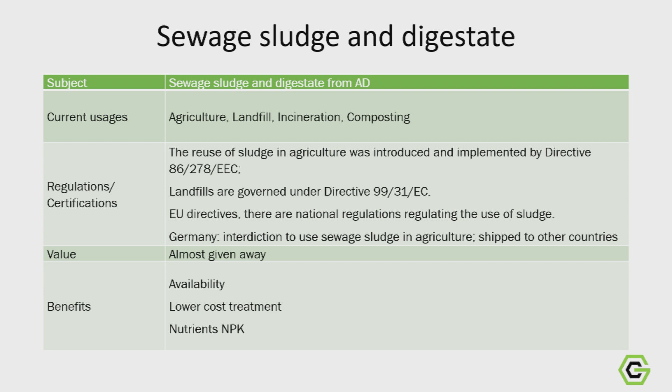What is driving the opportunity with these materials? So again, manure, sludge, digestates after anaerobic digestion, and biosolids that come out of wastewater treatment plants. Project developers, technology manufacturers, and even some municipalities are looking at pyrolysis and gasification more to treat these. So the drivers for adoption would likely be the regulations that we mentioned. The tipping fees for landfills are starting to skyrocket. There's not a lot of space in landfills, and there's a big blockage of new landfills opening, which is really limiting the space.

And so there have to be ways to monetize rather than pay to get rid of. In the EU, there is also a push to recover more phosphorus and to depend less on imports of phosphorus from other jurisdictions.

The other piece is when project developers think about pyrolysis or gasification, they're also viewing digestates and biosolids as a very low-cost feedstock. Whereas most pyrolysis and gasification is done with wood waste, or more and more agricultural waste, there is still a significant cost linked to purchasing or bringing these materials to the facility. So digestate, in some cases, and biosolids really provide this opportunity to optimize the economics of the project based on the cost of biochar. Of course, they make different products, but that's something we see as quite interesting. Even more so for biosolids, where these plants can actually receive tipping fees for taking this material.

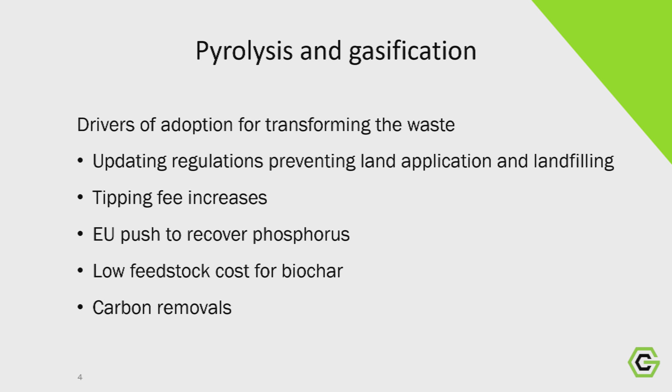And the last piece is carbon removals. Obviously, there's a lot of focus here on carbon today. We do carbon project development. Our clients get into this space also with the intention of generating carbon revenue, in addition to the tipping fees, and potentially also selling the biochar. So all these revenues become stackable.

So this is a very similar table, just a comparison, but for the biochar from sewage sludge. The current usages are varied. It depends if it is digestate or sewage sludge biochar. It depends on the properties of the biochar, but generally we see that it's used in agriculture, in construction materials, for composting, for example. So the standards that have to be respected for agriculture are very important.

And I would say that another driver, I forgot to mention it, that's a little bit last minute, is contaminants. So PFAS in biosolids particularly, and other types of organic contaminants that can come also from anaerobic digestate, not necessarily from food waste, but maybe other types of feedstock, can also cause problems. And the legislation is coming into place to limit the usage or even to limit these contaminants in the environment. So when we're transforming them with pyrolysis or gasification at certain temperatures, in certain conditions, we can degrade these contaminants, or a big part of these.

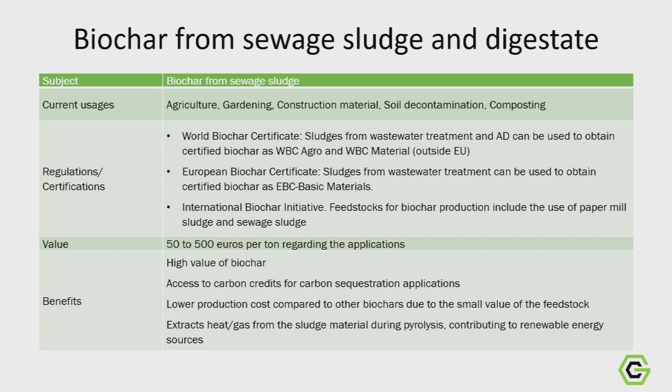So now that we talked about making pyrolysis and making biochar, how do we actually use it? What is this biochar useful in when it comes from wastewater, biosolids, or when it comes from digestate? There are different ways of adopting it and using it. I've also included in this list the usage of biochar that don't necessarily come from these feedstocks, but that can be used in processes around anaerobic digestion, for example.

We've seen that some tests are being run for usage of biochar directly in AD reactors. Some results have come out with increasing methane yield, so that's pretty interesting, right? Increasing revenues from biogas. And we've also seen people using biochar in composting. So, for example, anaerobic digestion biochar can be used in composting, probably to accelerate as well the speed of composting.

We also have a client that has tried putting biochar in manure lagoons for treatment, and when they showed up 2 days later, there was barely any smell in pig lagoons. So that's pretty wonderful, and it's really around, again, this anaerobic digestion and methanization processes.

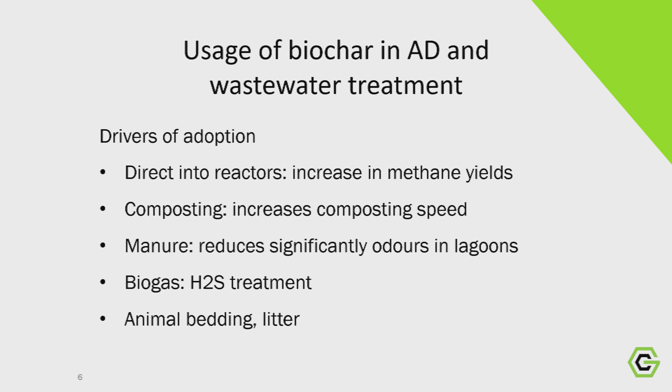Finally, 2 examples, and I'm sure that maybe some people will talk a little bit about these too, but there also have been more and more trials for H2S sorption or removal in the treatment of the gas coming out of biogas, and also in animal bedding. So that's a really good example: biochar from anaerobic digestion can be put in animal bedding, chicken litter, for example, to absorb ammonia, reduce pulmonary diseases, and reduce odors, of course. So this was very brief.

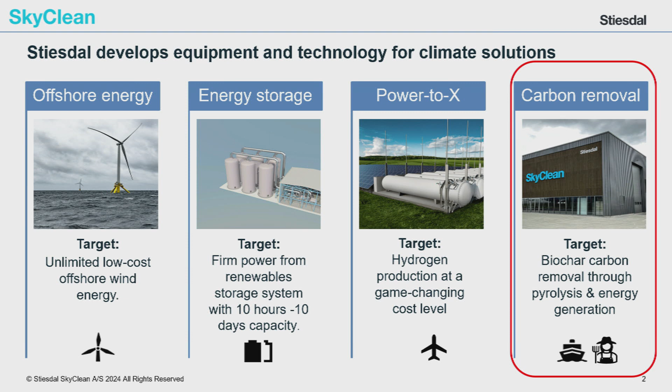Just briefly where I come from. The main company is called Stiesdal, and we have 4 subsidiaries working with different kinds of technologies for climate solutions. So we work with offshore floating windmill foundation, we work with energy storage, we work with electrolysis, and then we work with carbon removal, which is through pyrolysis.

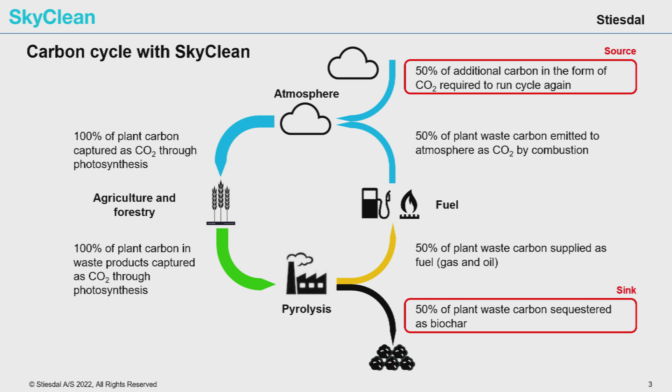The basic idea of producing biochar is kind of laid out in this nice little cartoon. So we let nature do the job of taking the CO2 out of the atmosphere. We take residues primarily from agriculture. We also work with forest residues, but primarily with agricultural residue. We take the residues and then we do pyrolysis. We make biochar with a high permanence, and then we use the gaseous products for energy purposes. And with the one I will talk about today, it's the simplest way of utilizing the gas, so it's just pure combustion.

So the way we do pyrolysis is that we have what we call an updraft pyrolysis reactor, and for that to be as smooth as possible, we use pelletized feedstock. So we have our own pelletizing. We also have drying if it's a wet feedstock, which digestate usually is. The nice thing about doing pellets is that you have a very smooth operation of the process, but also in this process you get the biochar out as pellets afterwards.

So when you look at the whole value chain, you will need to bring the biochar back to agriculture. We are focusing on very big plants, so we are going to handle a lot of biomass, and we are going to handle a lot of biochar, and primarily in an agricultural context. So we need to have something afterwards that is durable to handle and durable to spread out, but I'll get back to that.

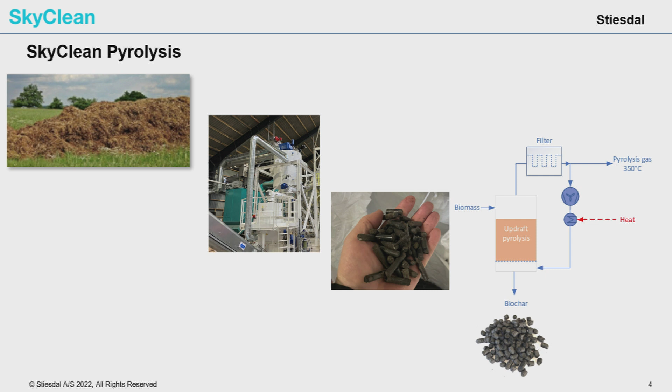We are not an old company. Basically, we started with pyrolysis a bit more than 3 years ago. The process that we have came from the Technical University of Denmark, and that's actually my background. I worked there for 20 years with pyrolysis and gasification, developing new technologies. So I kind of took my baby under the arm and then went into this company. And then it's been a relatively fast track since then. So what we did was actually build a very small scale plant to begin with, but fully automated to get hold of the controls of the process.

Then we built in 22 a 10 times bigger plant, which is still running, and it's in operation today as we speak. That is mainly fueled with straw pellets, which we buy commercially. Sorry. So all the learnings we had from that, we put into the next scale up, which is our 20 megawatt plant, which we have built right now, and it's being put into operation as we speak. It's, as you can see on the picture, placed next to a very big biogas plant. I think it's producing around 15 million cubics of upgraded methane a year, so it's quite big.

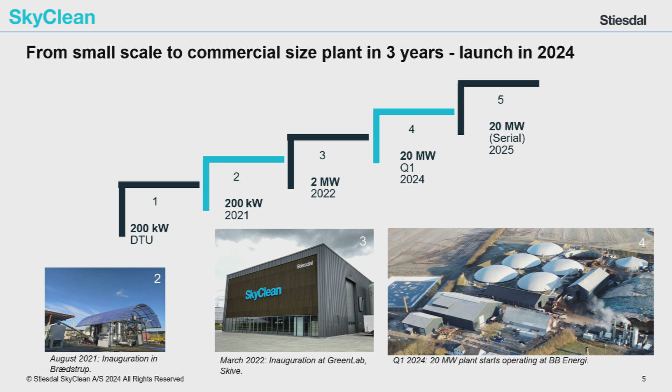And where we built this pyrolysis unit, we call it a 20 megawatt, but right now there's not feedstock enough for more than maybe 12 megawatt input, but it's built for 20 megawatt because they are going to build out the biogas plant quite soon, so it's more or less going to be doubled. So we are starting the commissioning right now. It's rather complex because it's integrated with the biogas plant, but again, as Melissa pointed out, it's on the other hand a cheap feedstock for the pyrolysis.

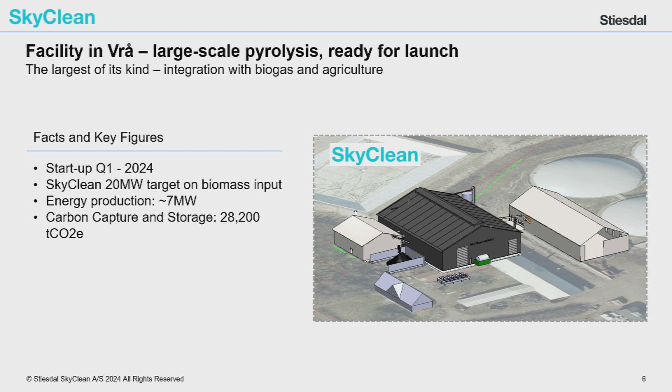We will produce around 7 megawatt of energy when we are up in full scale. There is a surplus of energy, which is cooled away right now, but that's only because the plant is not connected to the district heating grid, which we have a lot of in Denmark, but it is prepared for that. We need to do some piping to the nearest city because, of course, this is placed outside of settlements because it's a very, very big biogas plant. So the basic idea is to produce carbon capture via biochar, which corresponds to around 28,000 tons of CO2 equivalent a year.

On a sketch, it looks like this. So we have what we call the wet building, where the digestate is dewatered. Then it goes into the SkyClean building, where there's a disc dryer for drying the feedstock. Then there's a pelletizer. There's a pyrolysis unit here. The gas goes outside into a separate boiler room where it's combusted. And the hot exhaust gas is used for running, of course, the pyrolysis, but also running the dryer.

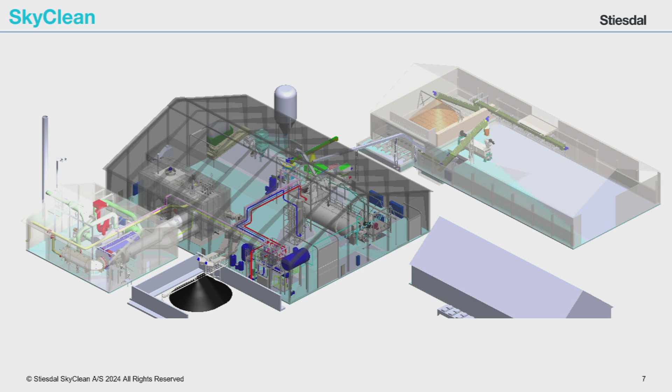Out of the dryer comes pressurized steam at about 4 bars, which means that we can condensate that steam out at around 140 degrees, which is temperature enough for the upgrading of the biogas. So that heat goes to the amine plant at the biogas plant.

In real life, it looks like this. So this is what we call the wet building. There we have the SkyClean building, and then we have the boiler room. Over here is the existing amine plant for the upgrading of the biogas, where we're going to deliver the heat for that. So today they burn methane to heat up the amine plant. So there was actually going to be an increase in the net production of biogas from this plant, because we are going to deliver the heat for the plant, so they don't have to burn any gas.

So with this, we will have CCS production with the biochar. We will produce energy for the biogas plant. We will increase the net production of the biogas plant and of course the CO2 footprint. We are selling, to begin with at least, we are going to sell carbon certificates. We actually managed to sell the first ones from our smaller plants on straw, so we are getting the first experience with selling carbon certificates from biochar.

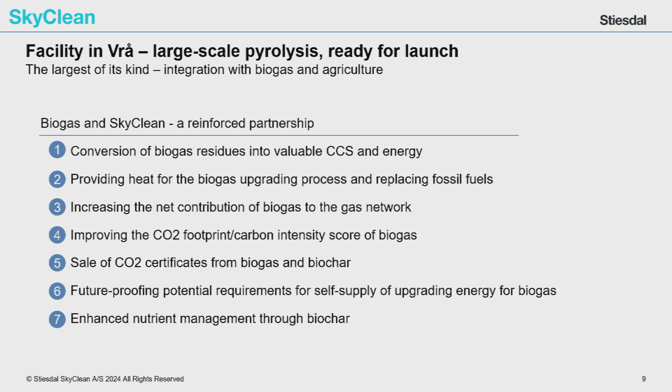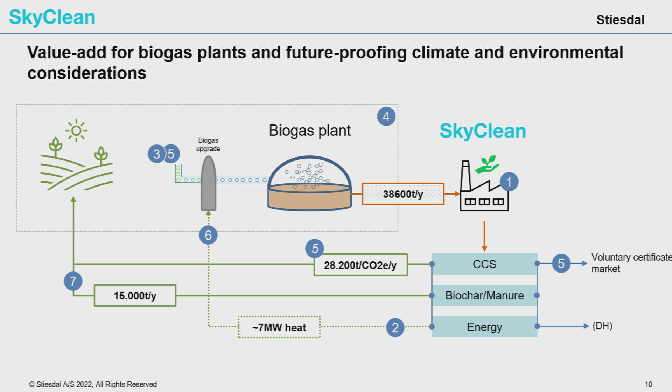So in the future, the idea is that these plants, energy islands or energy parks or whatever you want to call it, are self-reliant with energy, both heat and electricity. So in an overview, it looks like this, where we have the biogas plant, we have dry matter to the pyrolysis, we do the carbon sequestration, and we return that to agriculture. We sell some carbon credits. We could also in the future sell district heating, and then we have this heat integration with the biogas upgrading.

For the carbon credits, it looks like this. So we have the dry matter going to the pyrolysis, then we have the biochar. Because it's digestate, there's a lot of ash in the biochar. So more or less half of it is ash. But there's also carbon, which is equivalent to these 28,000 tons of CO2 a year. But then there will be an additional displacement because we handle the wet feedstock, and also because we are not consuming biogas for upgrading the biogas. So overall, it looks like this.

And the biochar, the ash, that has some fertilizer value. To begin with, we are not going to try to sell that fertilizer value. We are giving it away to the farmers who will take the biochar. So they will get kind of a small benefit of getting the biochar and incorporating that in the soil. But we don't put any value on that at the moment.

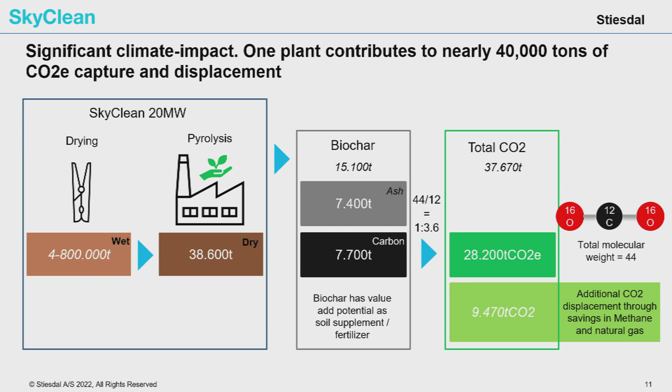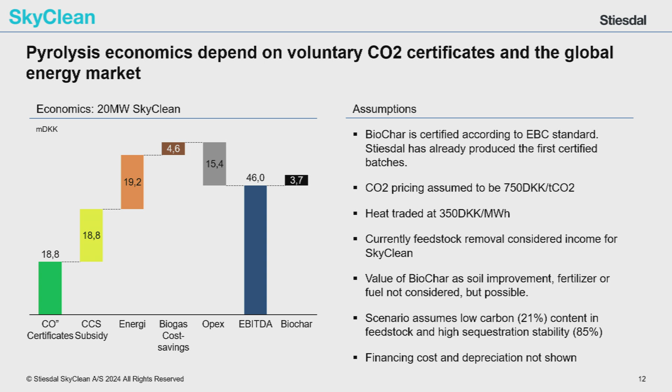The economics of this looks like this, at least in Denmark. So I apologize, this should be CO2. So we will sell some CO2 certificates. There is most likely going to be some subsidies in Denmark, at least for CCS. So we incorporate that, we will sell some energy. And then there are these savings for the biogas plants. And then, of course, there's some OPEX, and it will cost a little bit of money to distribute these relatively large amounts of biochar.

But one of the things we are looking into is, instead of selling carbon credits, seeing the biochar as giving value to this thing called the carbon intensity score for the biogas. So instead of going out and selling carbon credits for the biochar, you could incorporate it in this carbon intensity score for the biogas instead. So we, together with consultant companies, are looking into this.

If this is doable, it's a relatively easy way to handle the biochar, but it also gives a lot of value to the biogas. So instead of having a CI score of -20, we potentially can get to a CI score of -105. And that puts a lot of value on the biogas, or the biomethane that we produce for the grid.

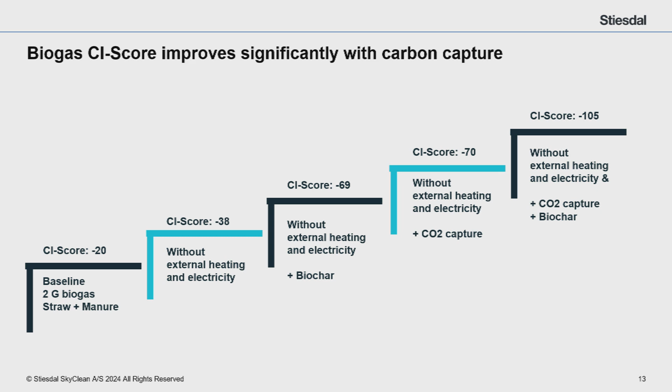So basically what we are working with in this project, or in this scale-up, is the full value chain. So we have a lot of farmers involved in delivering feedstock for the biogas plant. These farmers are also involved in taking the biochar. And in between there's the technology, so the biogas technology and the pyrolysis technology. And then of course there's the whole economic basis of the plant.

But from the beginning on, we involved the farmers a lot, down to the single farmers, but also the farmers' organizations, and also cooperatives of farmers, and they are also going to invest in these plants in the future.

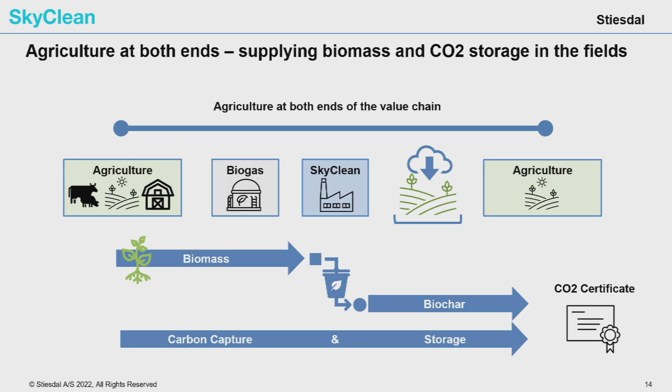Just as an example of that, we do a lot of soil trials with our biochar, and we are going to do that for many years in continuous trials. But one of the major things to begin with was, are we able to handle the biochar in our agricultural system? Are we able to use it in existing equipment? So this is an example of that.

Because we have the biochar as pellets after the pyrolysis, it's relatively easy to use it in existing farming equipment, and we tried several solutions for this, and it's fairly doable to do that. We wet the biochar a little bit when we get it out, primarily to avoid self-ignition, but also so that it doesn't create dust and it's easy to handle, and that is actually looking to be quite straightforward.

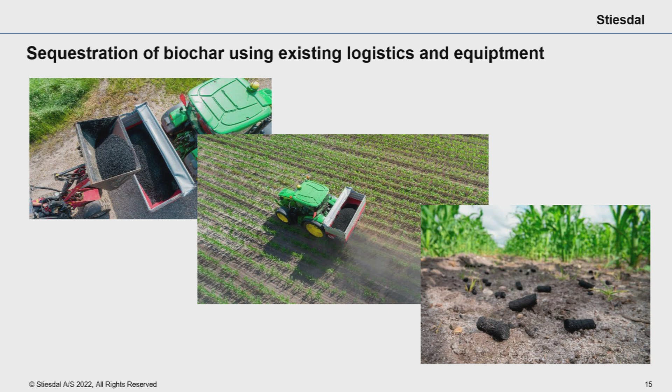The important part when you want to use the biochar on agricultural soils is that it's a clean biochar. The permanence is of course important, so we do pyrolysis at 600 degrees, so we have an H/C ratio of about 0.3, but we also want a clean biochar, and we put a lot of effort in controlling that from the very beginning. Luckily, I had experience with that from the universities, from my previous life. But we can comply with all the standards in our process.

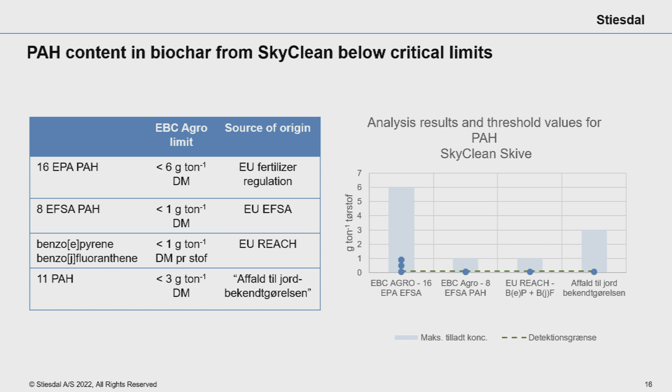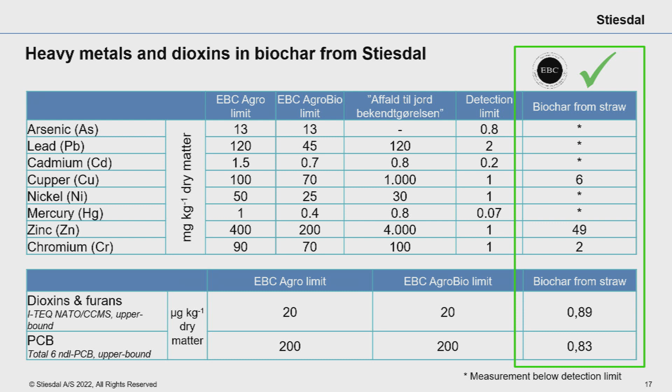And for the biochar that we have made on straw, we already have an EBC certificate, and we have, of course, made measurements also on the biochar made from the digestate, and we are going to get an EBC certificate on the new plant as soon as it is in operation. We have this on our webpage if you want to go in and have a look.

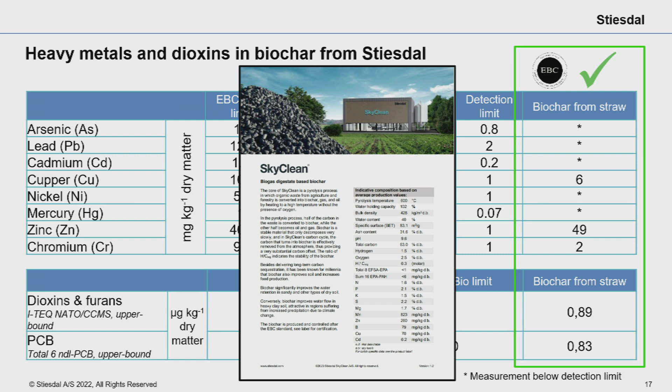I would also like to refer to our webpage because we had a press release yesterday that we are going into a joint venture with a big biogas plant producer to build very big plants, and we are talking about 60 megawatt of pyrolysis together with biogas plants. So if you're interested in that, have a look at our webpage or come to our stand over there at G28.

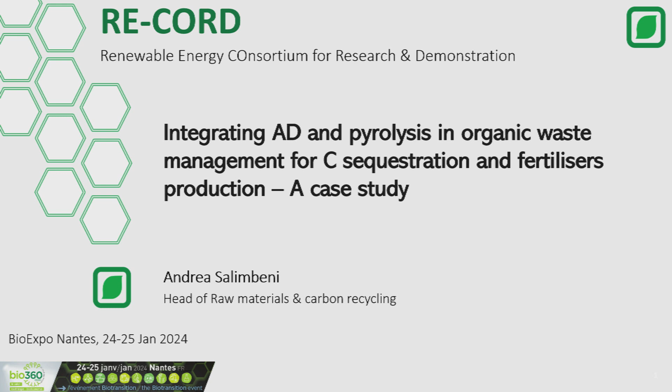Hello everybody. My name is Andrea Salimbeni. I'm head of unit at RE-CORD, a private research center based in the province of Florence. The study I'm presenting with this long title is about the integration of anaerobic digestion and slow pyrolysis applied to the organic fraction of municipal solid waste. So, as I said, a much different substrate to treat.

Briefly, the case study is a plant still to be built in the province of Florence with a capacity of about 40,000 tons per year of bio-waste, meaning organic fraction of municipal solid waste, and 2,000 tons per year of green waste, prunings and residues from urban green area maintenance.

Production of biomethane is estimated at about 2,200 tons per year. CO2 is separated from the biogas and liquefied, with a production of about 3,700 tons per year. Then production of biochar in the range of 1,700 tons, and ammonium sulfate at 33% concentration of about 2,400 tons per year. These amounts are those presented in the project for authorization by the regional authority in Tuscany.

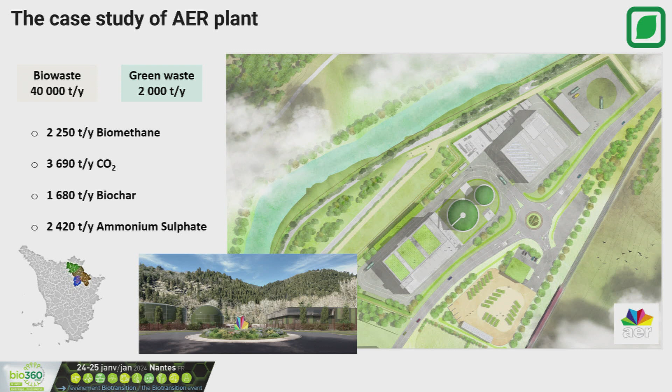As you can understand from the list of products, the plant will be an integrated plant for biomethane and liquid CO2 production from anaerobic digestion, and biochar production from the pyrolysis of the digestate solid fraction. The liquid fraction obtained after solid-liquid separation is treated by ammonia stripping and sulfuric acid precipitation to produce ammonium sulfate.

Well, some information about the energy balance is reported here, even if, of course, we do not yet have a plant ongoing. So what you see here is the result of a calculative study to integrate the energy of the process. Of course, we recover energy from the pyrolysis. Pyrogas is about 900 kilowatt of chemical energy recovered by thermally oxidizing the pyrogases.

An additional amount of natural gas is used, because here we are not talking about an energy plant. We are talking about a materials recovery plant. So our target is to be more than self-sufficient. Of course, we produce about 4 megawatt equivalent of biomethane. We consume about 2.4, estimating. We can consume less, but this is, as said, a study

where we use the thermal energy. We use thermal energy to dry the solid fraction after centrifugation. We use thermal energy for the stripping unit, because for stripping ammonia, we need to heat up the liquid phase at about 60, 70 degrees. And of course, to provide the thermal energy for the anaerobic digester, which is a thermophilic digester. So it works at

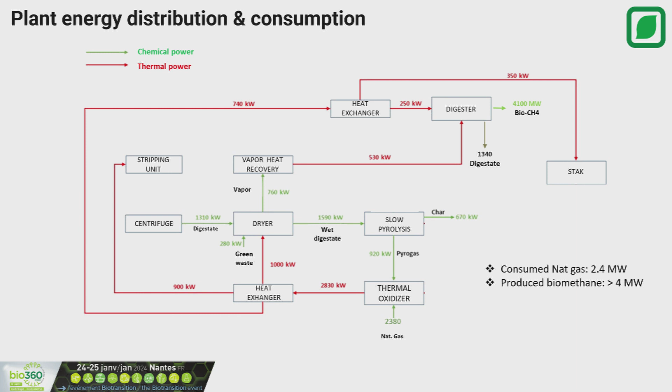55 degrees. So this is how we use the energy, and our target, as said, was to be self-sufficient, more than self-sufficient, and to recover products from the waste. So the process concept and the carbon balance is briefly reported. Here you can find an average carbon distribution between the products. We have about 1,000 in the organic fraction of municipal solid waste. We get about 270 in the digestate.

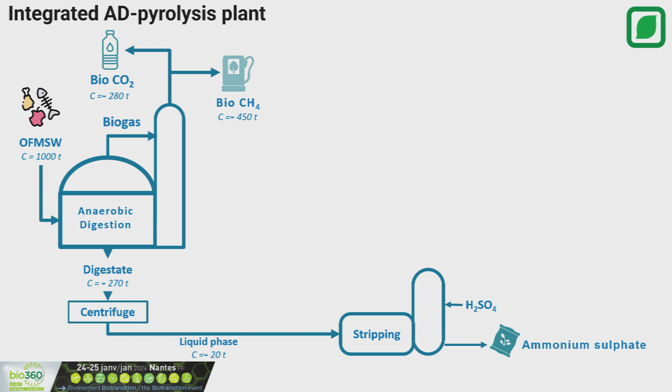So our target was to make the 270 tons of carbon available in terms of products. So usually after centrifugation, there is carbon lost in the liquid phase. We must take that into account. And then we go to stripping. We do not actually recover the carbon from that. We recover the ammonium sulfate. Then the solid phase with the rest of the carbon usually goes as digestate, which could already be a component material according to the fertilizers regulation.

It can be a product function category 3 as a soil conditioner, but it can also be mixed with green waste to produce compost. That is the traditional system. Compost is, as well as the digestate itself, a component material, and also can be a product function category according to our regulation. But this is what we do. We do drying, and then we do pyrolysis. The water that we remove after drying goes to the stripping unit, and then the pyrolysis enables us to recover biochar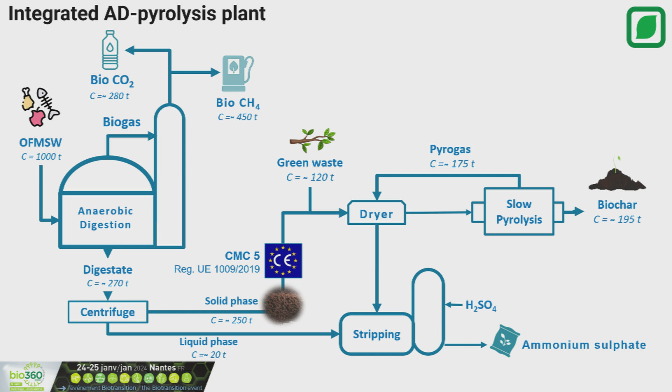for about 195 tons of carbon and about 175 as pyrogas, because of course we lose part of the carbon in the gas phase. And that amount of carbon is the carbon that we consider not recovered as a material. The biochar is a component material, CMC 14, and it can be, as we will see later on, a product itself, like

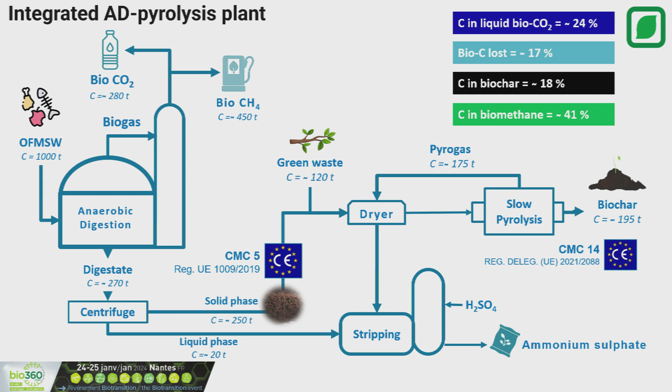compost. The difference here from the composting process is that we immediately lose part of the carbon by devolatilizing with slow pyrolysis, but we fix 18% of the initial carbon as char, and that is eternally fixed. So that is the target, storing the carbon. So the concept is supported by what Jesper was saying about the value of the product. Of course, if there was ash in the digestate after agricultural waste digestion, there is even more ash in the char after the digestion of organic fraction of municipal solid waste.

But we can reasonably consider that we have 1.5 to 2.5 tons of CO2 saved in 1 ton of char because of the equivalence with the molar mass. In this case, we can say that we store part of the carbon; 18%, as we saw in the slide before, of that carbon is stored in a long-lived carbon sink. Where the value of the biochar stays, we have to be clear. Biochar in agriculture is not in the European trading scheme.

So there is not a CO2 price of 80 or 85 euro per ton now. So we cannot claim immediately that the char gets that price because of the CO2 stored yet, because there is no one that can claim to the European Commission that that CO2 was absorbed within the ETS. Not yet. At the same time, there is no doubt that that CO2 is absorbed.

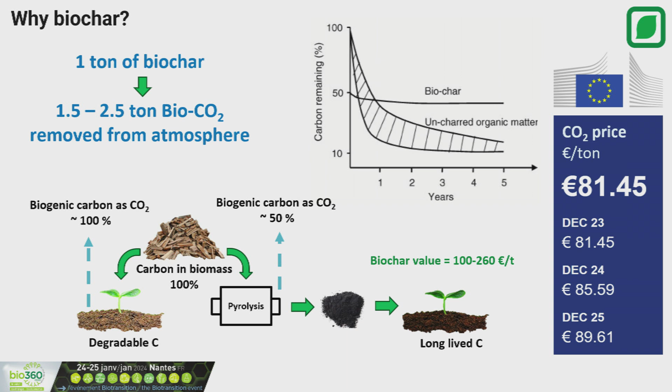Then any additional value which we can obtain thanks to the new ETS or to any carbon credit, it's an additional point. But what we have to trust on is the contribution of this product to sustainable agriculture.

Briefly about the normative context, as I said before, we have a conventional solution which brings to the production of CMC5 solid digestate because of a thermophilic anaerobic digestion, because our regulation says that the digestate solid fraction is a CMC if the anaerobic digestion was done at thermophilic condition, because it's stabilized. And that is a bio-waste treatment plant.

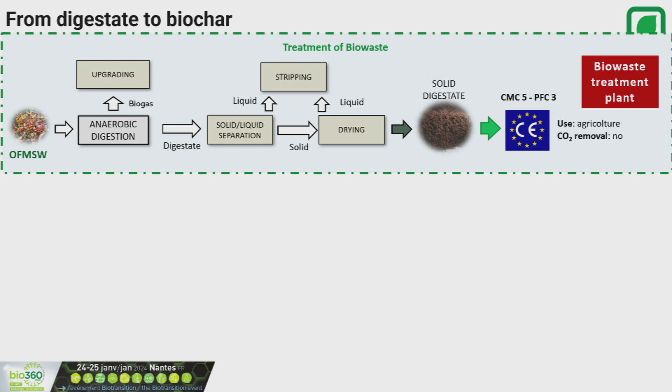Then the second part is including the addition of biomass as an additive and the production of a char, which is actually a fertilizers production plant, because we are mixing two products to produce another product, which is again a product under the regulation, as Jesper described before. Of course, we have to comply with the limits, because if we do not comply, that is an issue.

So the first aspect to take into account to be sure that all these business models stay and make sense is that the inlet material, the organic fraction of municipal solid waste in this case, complies with the quality that we expect to have at the end. So taking into account the heavy metals concentration is the first thing that we have to do. Otherwise, we risk that we build everything on a very weak structure.

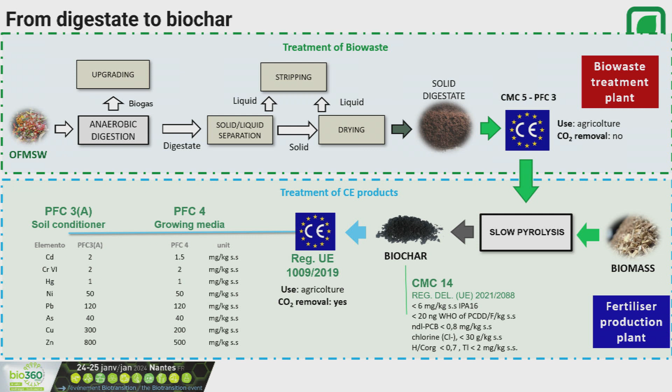Going to conclude, what we wanted to do by this project is to realize a carbon negative plant, turning the organic fraction of municipal solid waste into 4 products and having thermal energy as an instrument to get these products. And in particular, to have a product at the end with relevant quality for the market, which is a biochar, with a higher market value than compost, and with even better market perspectives, thanks to this specific quality of absorbing CO2. Thanks so much.

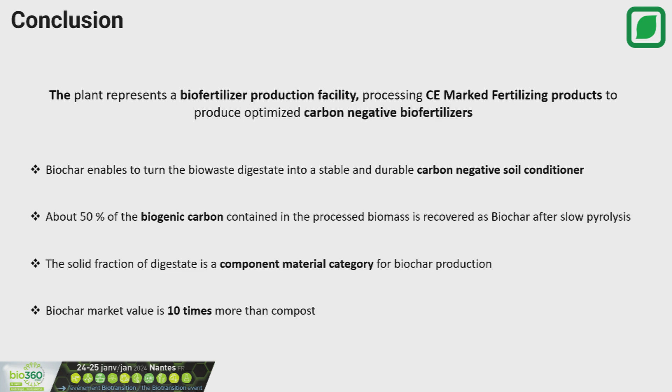Thank you, Andrea. It's quite complementary approaches. Biofertilizer plant, and on the other side, to enhance the profitability of energy production using carbon credits. It's really interesting. Some more questions to Andrea?

Hi. How did you determine how much green waste to mix with the digestate, and did you try operating without mixing any, so doing the pyrolysis purely on the digestate? Record is a research center doing demonstration tests. We have pyrolysis plants of up to 100 kilogram per hour capacity, and we did a test with 2 tons of digestate.

So we derived also the quality of the char and the mass balance that we can obtain by these tests. We did first 2 tests with a mixture of green waste and dry digestate in a 2 kg/h slow pyrolysis unit, condensing the fraction of the pyrogases and analyzing all the fractions to get quite a complete energy and mass balance. And then we did a test on a 100 kg/h unit to get also the evidence of the industrial feasibility of the process.